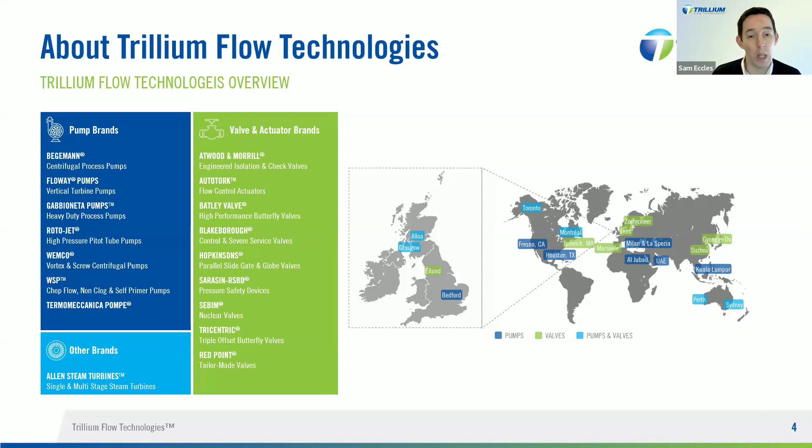We're going to talk a lot more about the WSP and Roto-Jet brands, so we'll just focus very briefly on the Termomeccanica Pompe brand. This is the most recent acquisition from a pump portfolio point of view, joining in April 2022 within the Trillium Group. That really expands our service portfolio, not just in terms of footprint around the world, but in terms of competence, giving us something none of the other brands can replicate, and allowing us to become a really leading service provider across all types of rotating equipment.

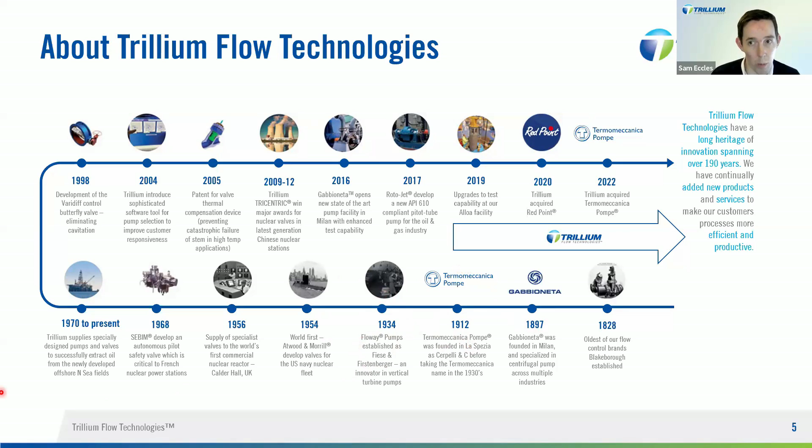We're not going to go through every brand in the interest of time, but let me pick out some key highlights - these three here all make up our pump portfolio. This is when we start to talk about three centuries of experience: you can see where we get that from, with the Gabbioneta brand in 1897, TMP formed in 1912, and Floway in 1934. Mine and Steve's role within the organization is to make sure we leverage all that IP, technology, and expertise within those brands, and look at how we bring them together to make them stronger as one business, more than just the sum of their parts individually.

For those of you who may not be too familiar with centrifugal pumps, we want to make sure we don't get lost in the terminology at the start. This is a very high level overview of the API standard designations, giving general terms for some of the pumps we'll discuss as we go through the webinar today. We recognize we're not necessarily just talking about the API industry, but these terms are generally used even to describe other types of pumps in terms of construction. So just as a very quick overview, you have OH, which stands for overhung.

You see 1 and 2 are horizontal, and the rest are all in the vertical orientation. BB stands for between bearing, so you have a bearing either side of the pump's impeller. All of those are in the horizontal configuration, and then VS as vertically suspended, as you can see there.

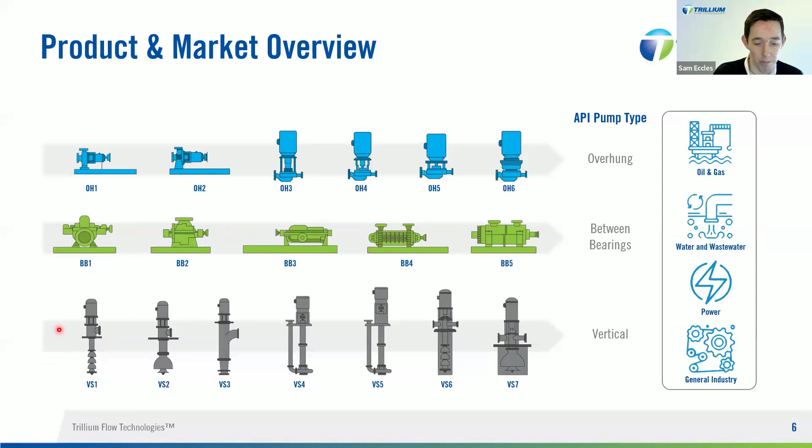Okay, so with that introduction, what we really want to talk about today is the challenges with low flow, high head applications. So we really want to talk about why these are viewed as problem applications, what some of the solutions are, and really why they're so misunderstood as a general area of the market.

So there's a variety of reasons for this. One of the first things we want to do is define what we mean by low flow. Typically we'll talk about anything that's below 100 meters cubed an hour, 440 US GPM, and above 150 meters, or 330 feet.

The reason these become so problematic is you can see from the chart on the right, for any given centrifugal pump, this is a typical head flow curve in blue and an efficiency curve that you can see in gray. At any given point, it's going to have a best efficiency point. This is where the pump is designed to operate, where vibration is at its lowest and the pump is providing its optimal efficiency.

As soon as you move away from that, efficiency tails off, vibration increases, and ultimately you get outside the preferred zone, into the allowable, and ultimately back to the limit that will be defined by the pump manufacturer. But as a general rule of thumb, the further away you move from the preferred operating range, the less mean time between failure you're going to have, the more maintenance you're going to need.

Two things that bring down centrifugal pumps are bearing failure and seal failure. The number one cause of those, from a mechanical point of view, not a process point of view, is vibration. So anything we can do to keep the pump operating here is going to improve uptime and reduce the number of problems end users have to deal with.

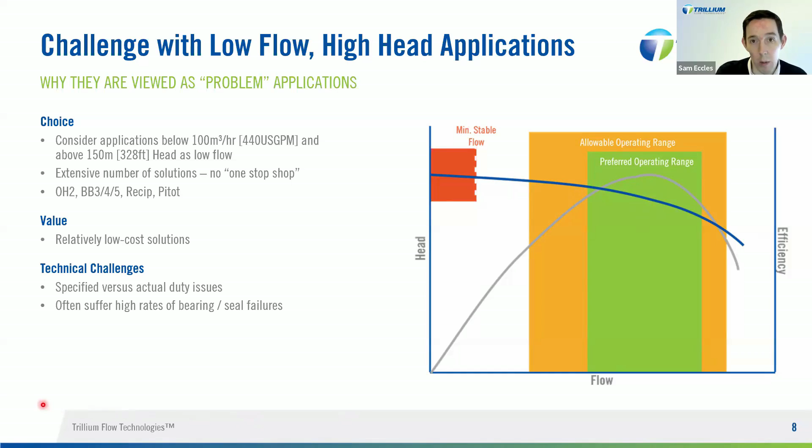In general, if you were to talk with any end user, most of their problem applications will be pumps operating within this low flow, high head range. So that's the problem we're trying to solve. Over the next 5 minutes or so, we'll run through some of the standard solutions, and then Steve's going to take you through our pitot tube range and explain where that has its place in solving some of the problems in this market.

So the number one, most common pump in the industry, almost any industry, is this end suction, top discharge, very standard centrifugal, single stage, overhung pump. It's an OH2 per the designations we talked about earlier.

The advantages to this: they are very low cost, they are very well known. Probably 3/4 of the pumps on a refinery will be this kind. If you're in a chemical plant or water treatment plant, most of the centrifugal pumps will look like this.

Relatively low head. So in terms of some of the challenges, as we need these ultra high pressures, these pumps become unsuitable. And equally, as we go to very low flow, so below 20 meters cubed an hour, 90 US GPM, these pumps will start to struggle, just because getting these passageways cast becomes very challenging.

So there's a finite size that you can go down to, and then per the chart we showed previously, you end up operating at a much lower flow than the pump's designed for. The pump will vibrate more, you will run into more problems.

In terms of the head limitation, you're really limited by how large you can make this impeller. We are governed by API deflection limits at the seal face here. This is an overhung shaft and overhung bearing, and we can only run these impellers to a certain size before we get unacceptable deflection levels, which would ultimately cause seal failure, both through vibration and through shaft deflection. So for the very highest head areas we want to get to, these pumps run into limits. But in terms of the vast majority of the market, this is the go-to solution.

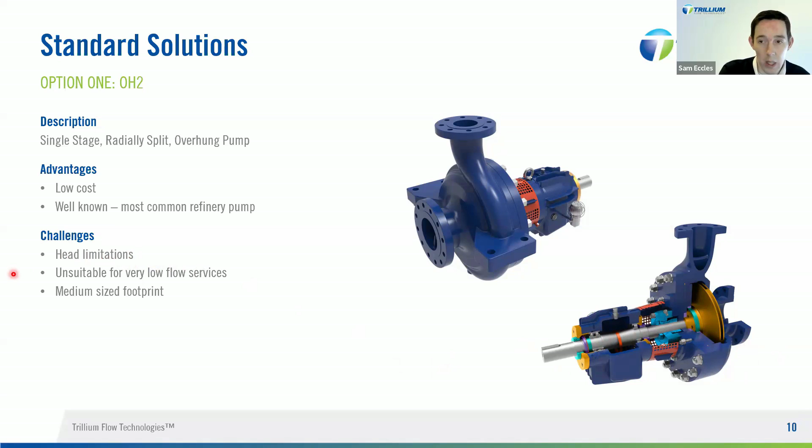Now, as with anything in engineering, you don't get anything for nothing, and the price you pay is these are very low efficiency. Typically these units, it's not uncommon to be below 10%, and that's 10% at its optimal operating point. If you operate away from that optimal point, you can be at 5, 6, 7%, very commonly on this type of pump. Now it will operate reliably there, but it's not efficient. And again, if you have one of these pumps, that's not a problem.

If you have 100 of these pumps, that starts to become very significant. And that's where it's very important for these low flow solutions to be looked at as a holistic proposal and not always just in isolation, because in isolation, it will often make sense to go down this route.

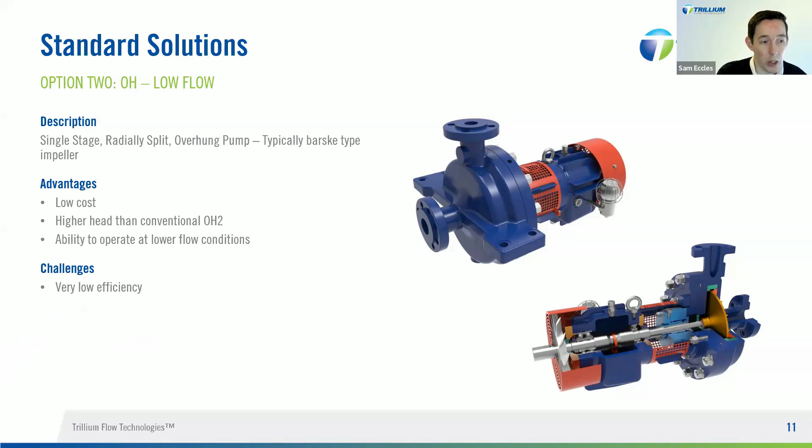If you have more than a handful of applications, it may not. It's important to note, energy cost is by far and away the largest cost associated with installing any piece of rotating equipment, especially pumps.

If we then get onto units that are for significantly higher heads, these will go well in excess of 1,000 meters, over 3,300 feet. These are a huge order of magnitude more expensive than the previous pumps we've shown, as you can tell just looking at the construction. They typically can be 5, 6, 7, 8, 10 times more in terms of cost, but they will achieve duties that the others simply can't.

When these are operating at BEP, they are much more efficient. Typically, you'd be looking at 60 to 70% efficiency at around the 100 meters cubed mark for this type of pump. They are often the only option for some ultra high head applications.

However, the challenges they come with: very expensive, as we've touched on. And if you start to get below 60 meters cubed an hour, you're really going to start to struggle with these. At that point, you have two options.

You can either recirculate some of the flow, and then what happens is the pump is going to look very efficient, but when you look at it as a system and factor in that recirculation, it will become very apparent it's not an efficient solution.

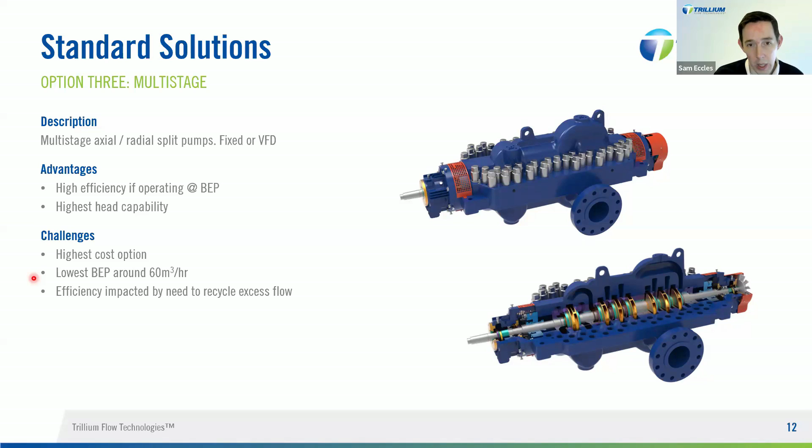Or there are some Barske type multi-stage pumps you can go to within the industry, but they are not a common solution and are not widely accepted within specifications at present, although that may change going forward.

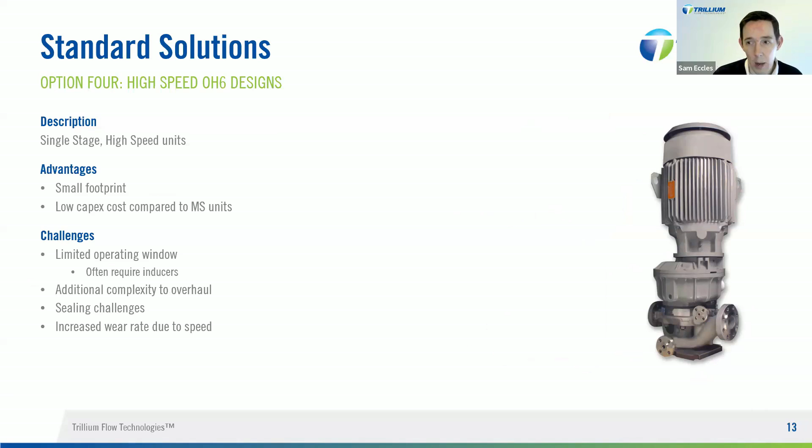If we look at option 4, this is probably what most people think of when they think of a low flow high head pump. It's an OH6 construction, as you can see by this graphic.

This is really quite different to the other options we've talked about. It has the conventional motor in a vertical orientation with a gearbox, and typically an impeller running at 20,000 RPM, when everything else we've talked up to this point would be capped at 60 hertz two pole, around 3,600. Because of the speeds they're running with this impeller, they need to run an inducer to make sure there's enough suction pressure within the pump.

Advantages these give you: they are a very small footprint, particularly being vertical, they take up very little space. They are very cost effective at the point of purchase, so the upfront CapEx cost is very low and they are very favorable in terms of those assessments.

But as we've mentioned before, and as we're trying to say all the way through, there is no one size fits all, and these do come with some limitations. The operating window is small on these pumps compared to all the other units we've looked at, and that is largely due to the inducer. Steve's got a slide he'll talk to you later explaining that in more depth, but for the purpose of this overview, all you need to be aware of is there is much less flexibility.

So if you are certain where you're going to operate, these are a very good solution. If the process is going to be consistently turned on and left running, very good solution. If you're going to have upset conditions or you need to achieve a wide range of duty points, these can be very problematic. And it's not just about whether you achieve a wide range of duty points, it's how accurately you are able to predict where you need to run.

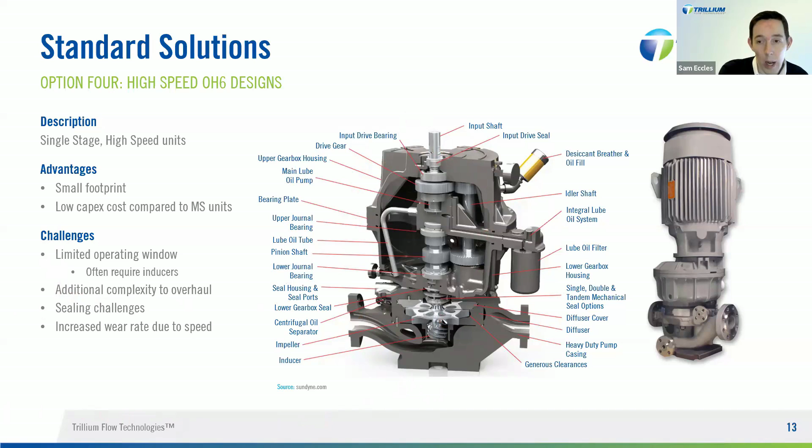The trade-off is these can hit head limits that you would only hit otherwise with the multi-stage BB3 and BB5 that we showed earlier. Then the last of what we're calling the standard solutions is positive displacement.

There are many types of positive displacement pump. We are just showing one of them here, the reciprocating pump. You can think of this very much like a car engine. It's got the same valve gear up ahead and a series of plungers instead of the pistons you'd have in your car engine. But in terms of principle, it's largely the same.

These are very high efficiency, very compact. You have the ability to put the drivers directly above the pump with belt-driven options. These can be made and fit into a very small space, reasonably cost-effective as well, depending on horsepowers and flows. Challenges that come with these: you have a lot of pulsations downstream of the pump to manage. These can be alleviated with pulsation dampeners, but you then take away some of the advantages because the skid becomes less compact and more expensive.

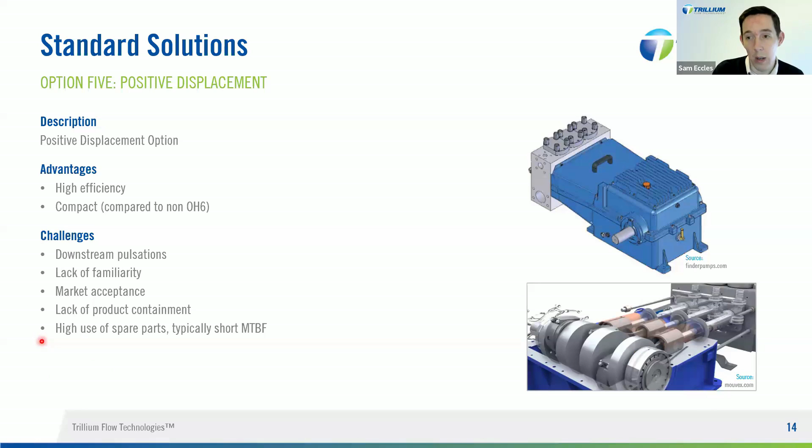Also, lack of familiarity, particularly outside of North America, I would say. Most people just won't consider these — it's not even open to be debated. And really the main challenge here is they do use a lot of spare parts. So the mean time between failure and overhaul isn't great, which means if you need something that's up 100% of the time, you're going to have a spare on standby that's also piped in.

So if we try and talk about another option, something Trillium is relatively unique in offering, it's our pitot tube pump range. We refer to this as the Roto-Jet series, and these are pumps that can be provided in a variety of configurations. We're showing it here in a between-bearing configuration, but we'll show you later it can be done in a similar way to the overhung pumps we've shown earlier.

The advantage here is it gives very reliable low flow, high head operation — much more so than the other designs we've touched on — and it allows versatility. Where you want to operate on the performance curve does not impact mean time between failure. Steve's going to talk in detail about why that is, but that's the main advantage these units have. No pulsations, so we don't have the challenge we talked about with the recip on the previous slide. And if you were to do a like-for-like at the same speed as an OH6, these will operate at a higher pressure and deliver more flow.

They're also very efficient within a certain operating window. In the studies we've done, if you're below 100 cubic meters an hour, 440 US GPM broadly, these will be more efficient. If you're at very low flows, sub 20 cubic meters, 90 US GPM, there'll be a huge efficiency advantage for these — they can be 4 or 5 times more efficient than a Barske OH2 design, for example.

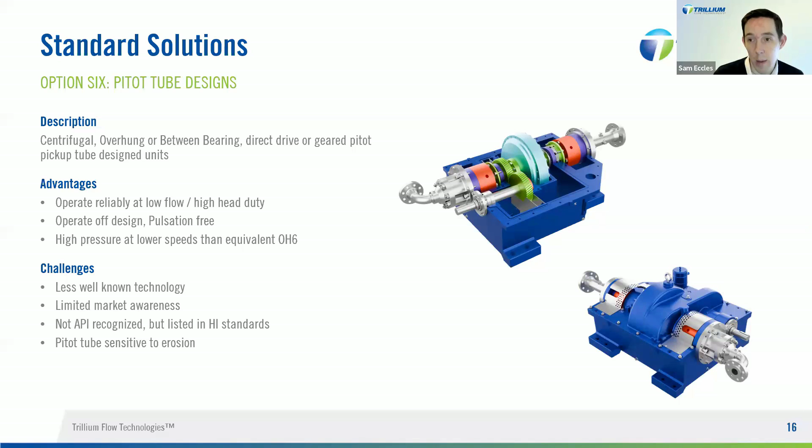And finally, as Steve will explain with the video we have later, the pitot tube, which is the part that does all the work in this machine — think of it almost as the impeller in a normal pump — is very sensitive to erosion. So if you have a process without any particulates or contamination, that's not an issue, but anything with contaminants in it is something that does need to be taken into account.

The key point we want to make here is these are not new pumps that we're showing. This is something we've been manufacturing since the 70s, and we have thousands of units installed in the field. Again, it's just about us trying to raise awareness.

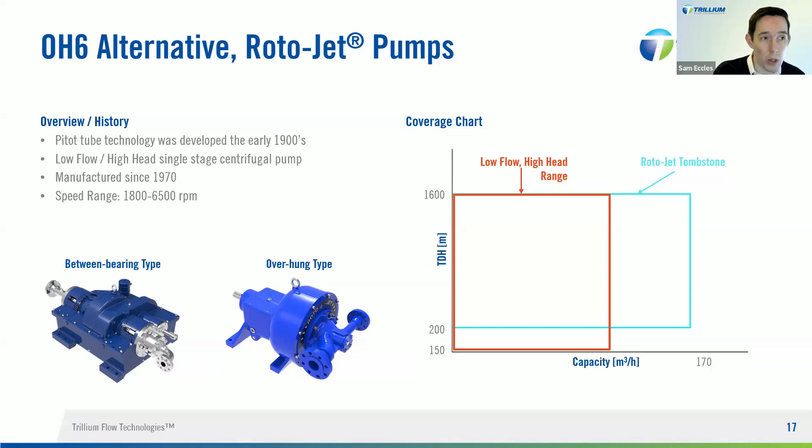As you can see from the two images there, we have the between bearing and the overhung arrangement. And with that, I'll hand over to Steve, who's going to take you through a bit more on the history and the technical benefits of the pitot. Thank you, Sam. Just very quickly, we'll take a look at the history of the Roto-Jet pump.

We first introduced and developed the pitot tube pump technology in the early 1970s, over 5 decades ago. Throughout the 1970s, we were quite active in development and R&D work, and were awarded over 40 patents on pitot tube pumps. In 1979, we introduced our first oil lubricated pump for the refining and petrochemical industries.

The following year, in 1980, we received the Chemical Processing Vaaler Award for a major contribution towards efficient plant operation. In 2004, the Roto-Jet pump was named the Technical Innovation of the Year by the British Pump Manufacturers Association. This was for our variable speed Roto-Jet technology using a switch reluctance drive motor.

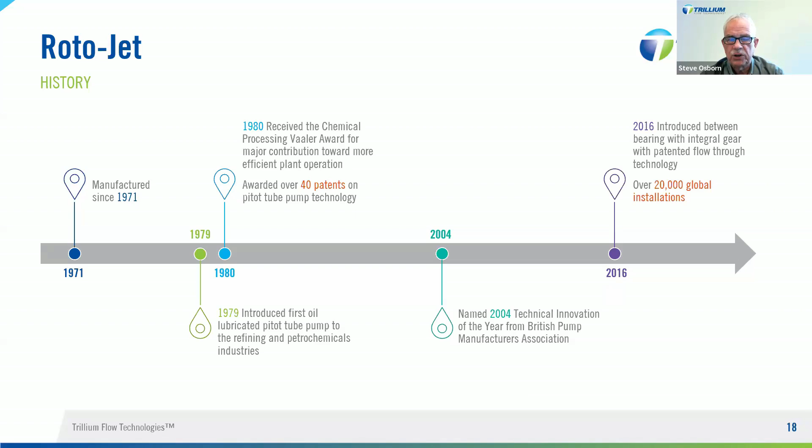Then in 2016, we introduced our between bearing design with our patented flow-through technology that allows us to have a very reliable design of a pitot tube pump for refinery service. There are over 20,000 installations of Roto-Jet pumps around the world, and we have quite a history of working with a variety of applications in a wide variety of industries.

We're going to go through a video here. It'll just take a couple of minutes, and I would like to walk you through it, so we can see the rotating element of a pitot tube type pump.

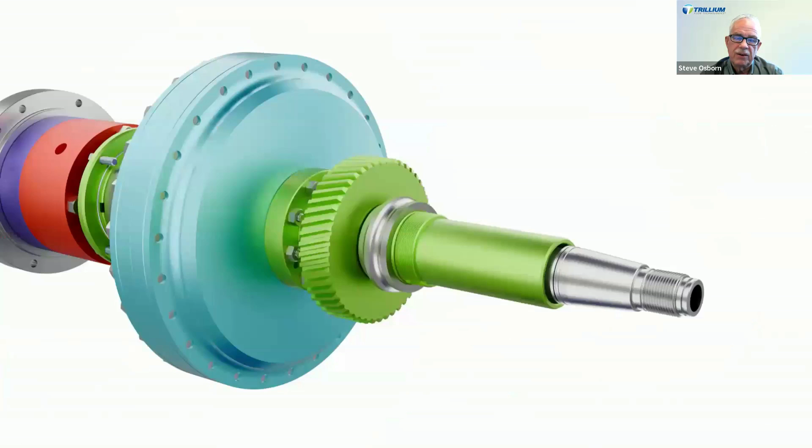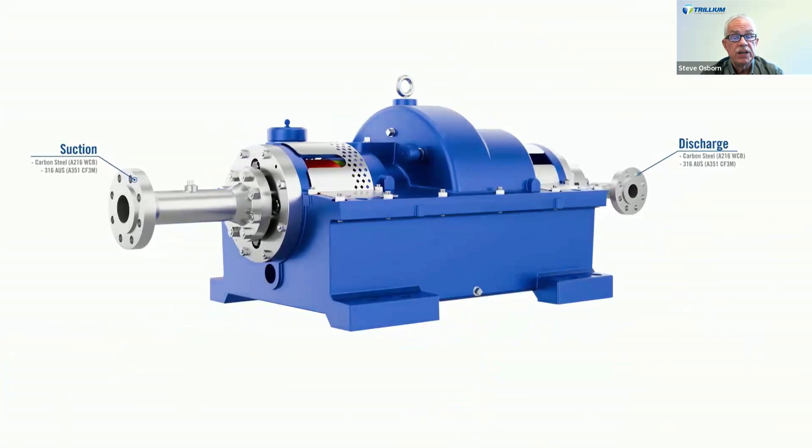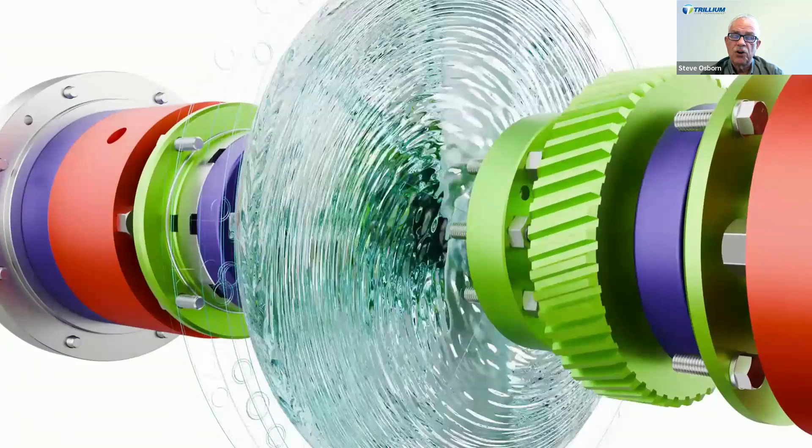The key working element of any pitot tube pump is the pitot tube itself, which is always stationary. You can see on this design that the liquid flows through into a rotor cover, into the rotating assembly, where we have vanes cast in the assembly that increase the velocity of the liquid. The high velocity liquid discharges into the rotating case, where centrifugal forces cause it to turn at the same speed as the rotating assembly.

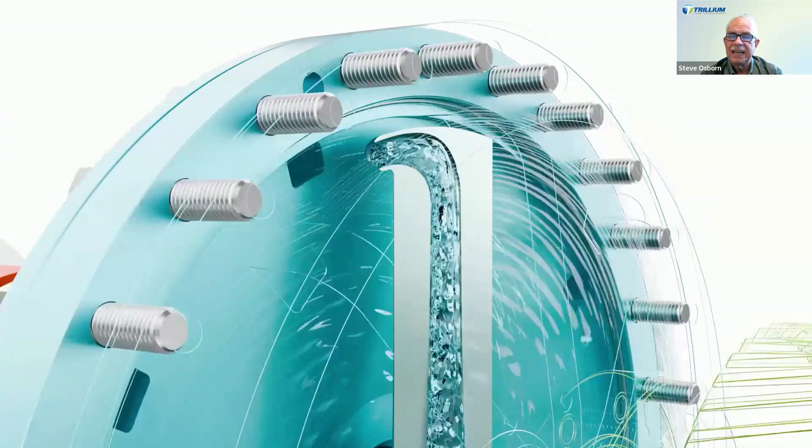It will then impact the stationary nozzle of the pitot tube, which acts as a very efficient diffuser to collect the liquid and discharge it out into the system. You can see through this design, it's actually quite simple.

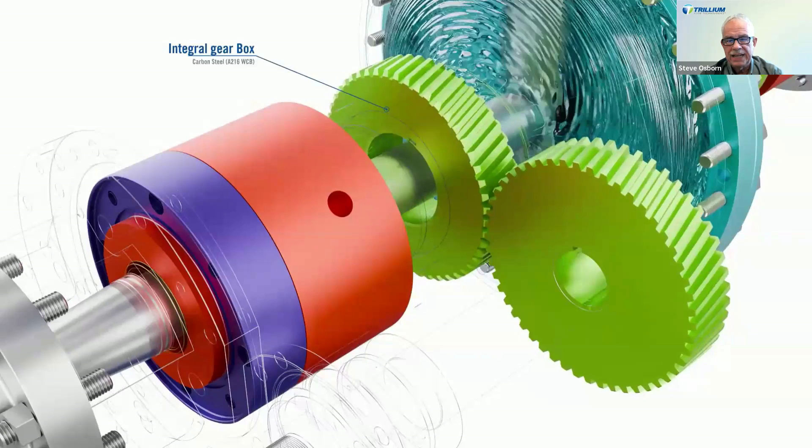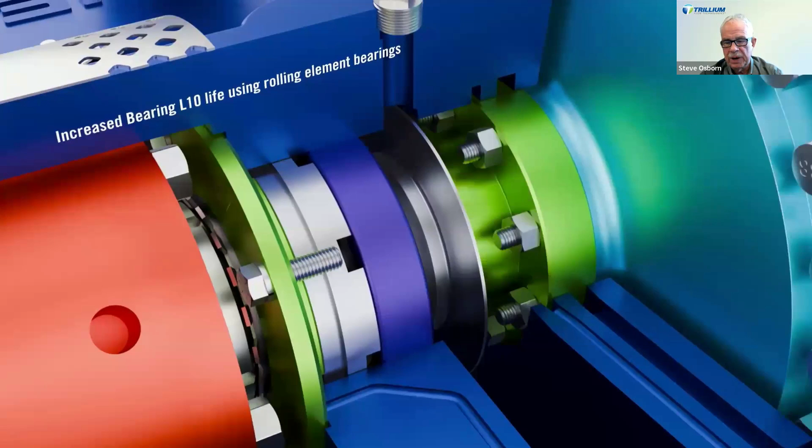We have cartridge mechanical seals on each side of the rotating assembly, and an integral gearbox that increases the speed of the pump. There's no external lube, and no wear rings required. We're able to have a very robust, simple design that will get high heads at very low flows quite reliably, and we have bearing lives that will exceed 25,000 hours.

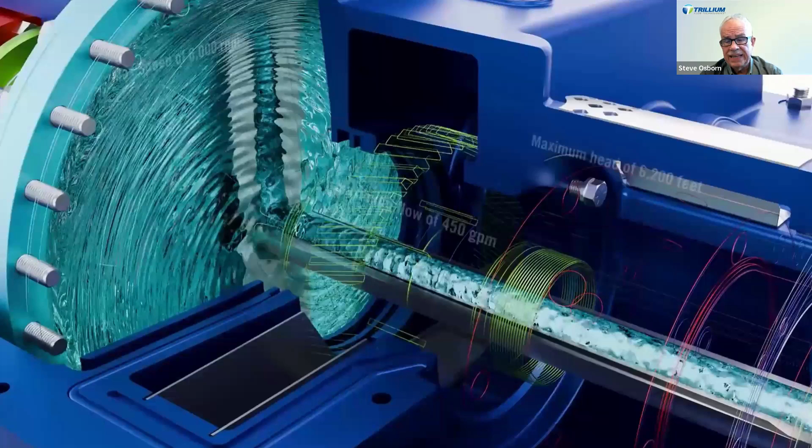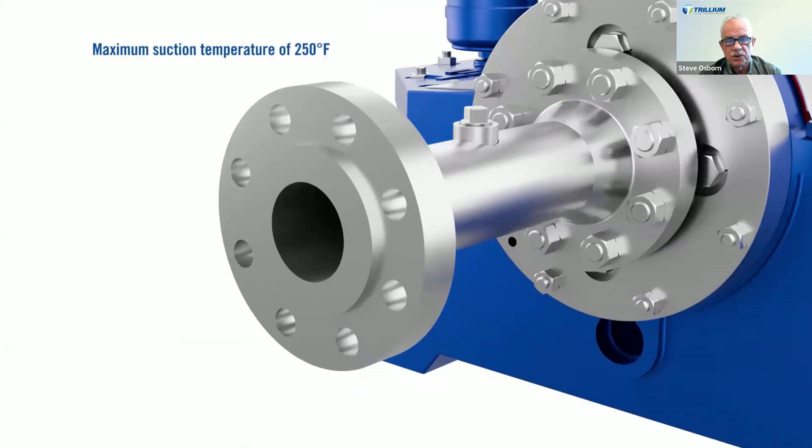We'll just quickly overview: you can see how the liquid enters in and then discharges out through the pitot tube. We can go up to, we'll go over the parameters, but up to 450 gallons per minute. So we go up to some decent sized flows, and we can go up to 250 or much higher if we have a seal flush available.

So we've got a very efficient design using the pitot tube pump technology, which is extremely versatile. We'll have a couple of slides where we can go through and explain how we achieve that versatility and how we achieve the different performance requirements in pitot tube type pumps.

So when we look at the Roto-Jet pump as an alternative to the OH6 technology, you can see the performance capabilities of the pump. As I mentioned, we can go out to 450 gallons per minute, or just over 100 cubic meters per hour, with heads up to 1,600 meters, or over 5,000 feet of head.

The maximum suction pressure is 300 psi, or 21 bar, and without any flush at all, the maximum temperature would be 250 degrees F, or 120 degrees C. But we can go significantly beyond that if we have seal flush available, and perhaps cooling water for the bearings if we get into the very highest temperatures.

Our maximum speeds are going to be in the range of 6,500 RPM. Most of the applications that we're going to look at for pitot tube pump technology are going to be in the 4,000 RPM to 5,500 RPM range. And the maximum power is 400 horsepower or 300 kilowatts.

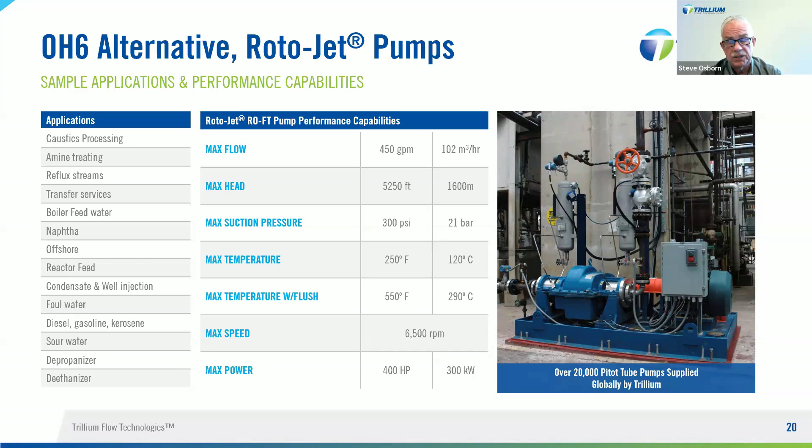So we'll take a look at how the principles of the Roto-Jet pump work and what some of those advantages are. One of the things is the pitot tube is always going to be stationary, and that stationary pitot tube is the heart of the pump.

If we need to change the capacity of the pump, we just change the diameter of the opening of the pitot tube. By changing out one component, we can go from a pump selected to operate at a very low flow rate to one that could go to our maximum flow rate by only changing out one simple part. The pitot tube always has an opening at the 12 o'clock position that allows the pump to vent any gas that's inside.

And if the capacities increase, then we would add a second opening, at 12 o'clock and at 6 o'clock. So there would be two openings on the pitot tube. It's always going to be stationary. There's never an occasion for the pitot tube pump to rotate at all.

Our pumps, the ROFT design we're looking at right now, are fit with API 682 mechanical seals and a cartridge design. We also have gas seals available, and the seals are isolated from the bearings to prevent any contamination from seal leakage into the bearing housing.

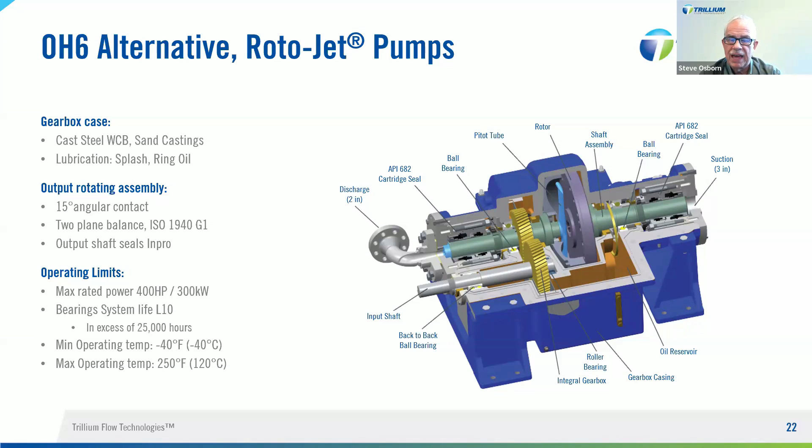So the key advantages of this type of pump, as has been pointed out already, is the ability to operate across the entire performance curve, including back towards shutoff and beyond BEP. We'll take a look at why that is.

The pump is very easy to maintain with access to the mechanical seals. You don't have to remove any gearbox components or worry about making difficult changes to replace a mechanical seal. You get smooth, pulsation-free performance because it's a centrifugal design. It's very simple, only two basic working parts, and you have a lot of flexibility. By changing one part, you can adjust the capacity of the pump quite easily.

The mechanical seals are only sealing against suction pressure. They're isolated from the bearings, and on our ROFT design, we take no exceptions to API 610.

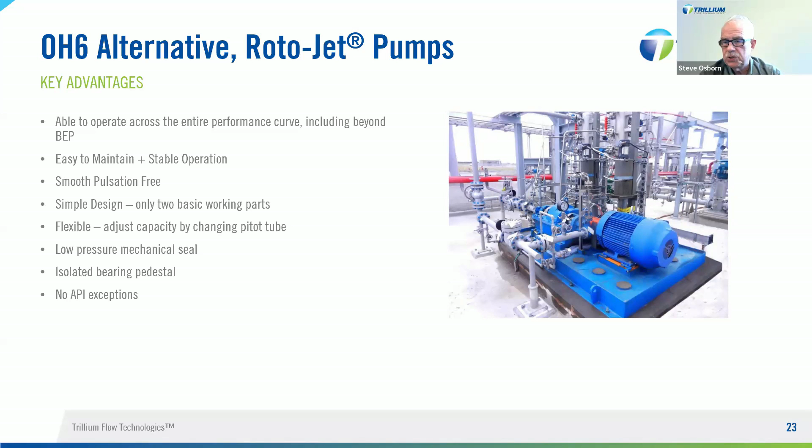So if you have a condition where the pump is operating with stable operation, no upset conditions, and is selected and operated at the correct design point, then the NPSH is going to be adequate. If you move away from that in either direction, you're going to start to see a significant increase in the NPSH requirements.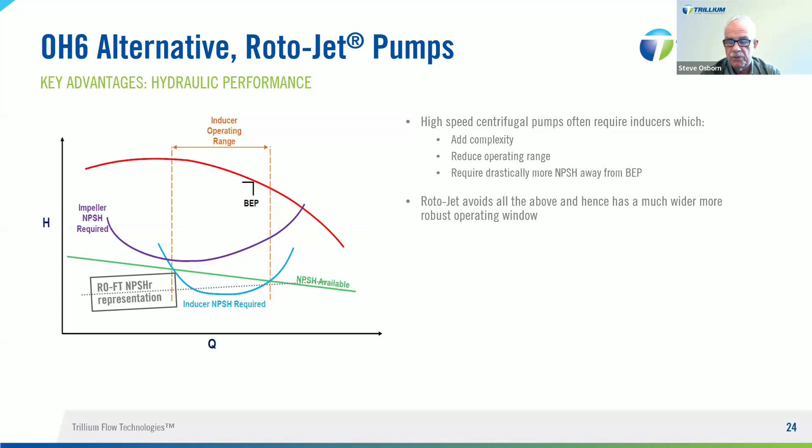And when pumps are designed, we'll take a look at what allows the pitot tube pump technology to operate at such a wide range of flow rates.

So when a normal centrifugal pump is designed, the pump designer has a given operating condition of a flow to achieve and a head to achieve, and that becomes the best efficiency point. So you select an impeller and design a volute to operate at that condition very efficiently, and at the design point, that becomes the best efficiency point of a centrifugal pump.

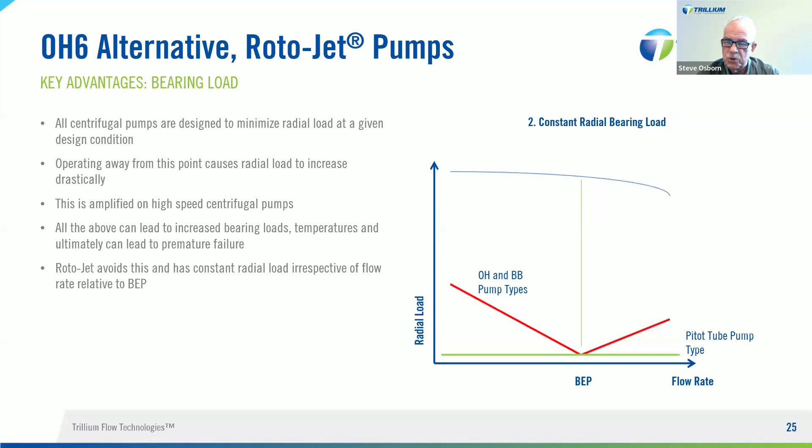When you look at the green line that shows the radial load on a pitot tube type pump, you can see that the radial load the pump is going to experience is constant regardless of the flow rate. So that allows the pitot tube pump to operate at very low flow conditions, all the way back to shutoff or beyond the best efficiency point, without seeing any increase in radial load. So you eliminate the shaft deflection you would see when you move away from the best efficiency point on a normal centrifugal design.

So when we look at our ROFT design, you can see that we have an API 682 mechanical seal. It's the standard size 8. We fit the pump with both the John Crane and Flowserve seals. It can be fit with any API 682 size 8 design.

We are familiar with and use all API flush plans. Most importantly, the seal is only going to seal against suction pressure. We don't ever have to seal against the discharge pressure or try to balance out any pressures in the pump. And there's no shimming required in the cartridge design when you replace the seal or assemble the pump. You just put in the cartridge and the pump is ready to go.

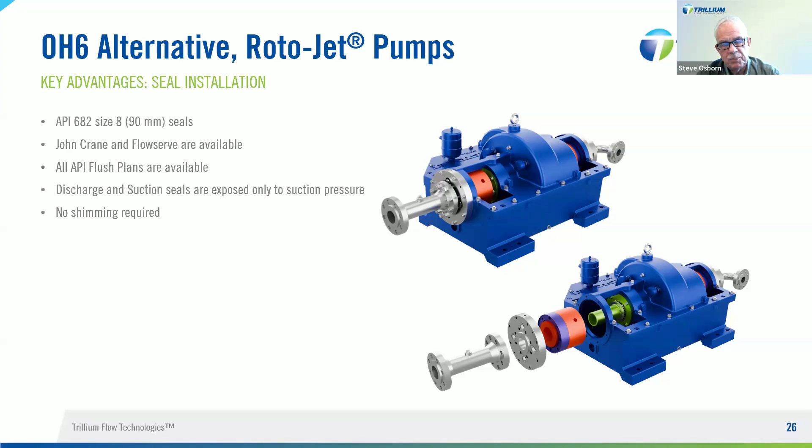So we'll look briefly at some of the configurations we have in pitot tube type pumps. Over the 5 decades, we've made a variety of pumps, and we still manufacture several technologies today. We also have, found in the API design and used in the petrochemical and refining industry, our model RO and ROH. It's an oil lubricated design, which has been around for a number of years and has quite a good reputation of operating reliably in refining and petrochemical services. It's an overhung design.

It does have some limitations, in that we can't have quite as much range and capability as our ROFT design that we've been discussing. We have several designs used in industrial services, including our RG and 2100, which are both grease lubricated pumps, as well as the 2200 pump, an oil lubricated pitot tube pump design for industrial services. We also have our R11 design, a smaller version of the pitot tube pump, which allows us to operate at lower heads and still have a competitive offering.

And of course, as was mentioned, we have our variable speed design, the VSR, which has inherent variable speed without a variable frequency drive, using our switch reluctance technology, which has become quite popular in certain industry segments.

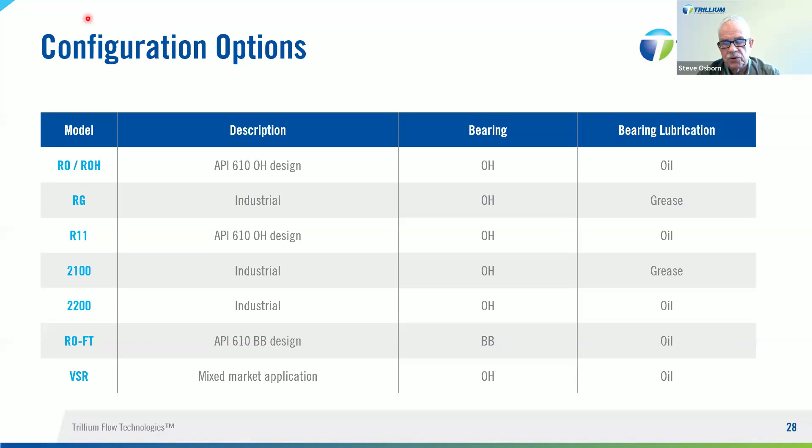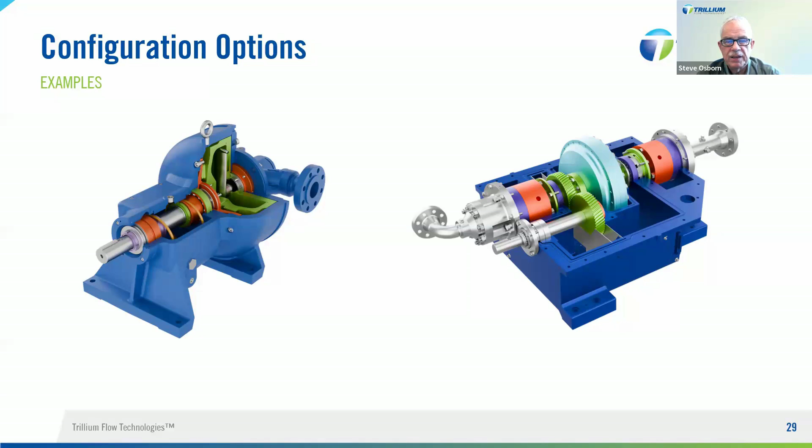Perfect. Thank you very much for that, Steve.

So with that, we're just going to take you through a quick case study example. This wasn't produced by Trillium, it was actually produced by Aramco. We're happy to share the details if it's of interest, and can circulate the full paper if you reach out via the contact address from the webinar. This was presented at the Middle East Turbomachinery Symposium.

This was really quite a common story of where Roto-Jet, or pickup tube, pitot tube type pumps, are best used and where they're most commonly retrofitted. As we mentioned at the start, and want to continue to repeat, there is no one-size-fits-all. None of these technologies is inherently better, it's all about knowing when each has its place.

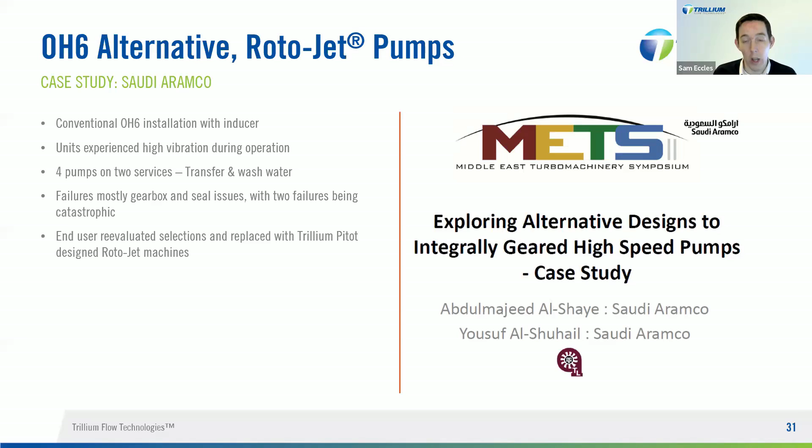We bring this up as an example because you can see the values here. Catastrophic means run to fail, so you can see the numbers - these are significantly more than the units would cost, whether OH6 or pitot tube type pump. As we mentioned at the start, because these are relatively low cost pumps, sometimes they don't get the scrutiny they need.

That means they sometimes go into services they're not well suited to, and you end up putting the wrong technology in place, which ultimately fails. It's not that the technology is bad, it's just that the design criteria didn't necessarily match the real world. What was found here was that once these were switched out with a pitot tube type pump - something that could operate away from design reliably, for all the reasons Steve touched on - these issues went away.

There were no repeat problems. Again, it's not about saying there was a process problem, it's about understanding the right pump for that process. And it's not just the process at its design point - it's how often it starts and stops, how often there's variation, how often something interferes to cause an upset condition. You only need the upset condition to occur once for one of these failures to happen, and you can see the values rack up very quickly.

These values don't account for loss of production, and they don't account for man hours - these are just parts costs. We just highlight this as one example of many.

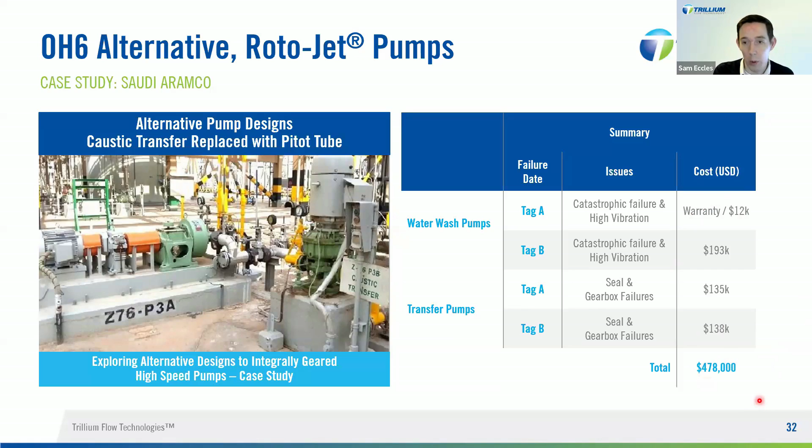So with that, we just want to give a very quick recap of the points we've touched on. Some of the advantages of Roto-Jet: reliability. It's fully compliant with the most stringent standards in the industry, whether that's API 610, 682, it's referenced in HI, and referenced and specified in Aramco standards.

Bearing system life exceeds the 25,000 hours needed for API. Number one advantage is they are flexible, with very low vibration levels, and can operate back on curve.

If there's any uncertainty or upset in the process, this is a very good technology to promote. That ability to run all the way from closed valve to 120% of BEP, you cannot do with a conventional pump, and you really cannot do with something like an OH6.

So again, safe - there's no emissions to atmosphere, and you don't have any pulsations to worry about either. From a cost-effective point of view, there is no one size fits all, but there are certain points within that low flow, high head tombstone that these fit incredibly well.

Sometimes there will be the lowest cost to start with, sometimes the lowest cost operationally, and sometimes neither. It's very important that we recognize that, and that statement is true for every type of pump we've mentioned in this presentation.

What we do feel, however, is these kind of pumps pick up a disproportionately low percentage of the market. It's our mission to make sure we change that over the next few years, because there are far more applications these are suited to that they're not selling into than the other way around.

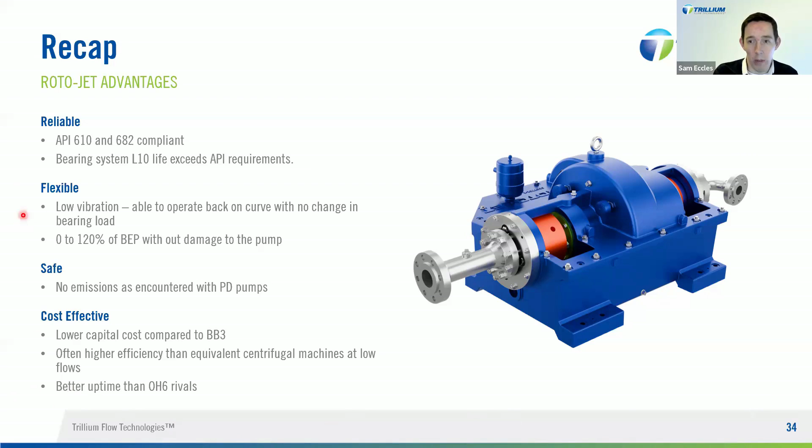And in terms of uptime, that's the real winner here, and it's because of the flexibility and the robustness of the design. Okay, and with that, we'll say thank you very much for listening.

What we'll do now is go through a few questions that have come in. The first of which I'll direct to Steve: are these only manufactured within the USA?

Well, historically, they have only been in the USA, but under the footprint of Trillium, it's been expanded where we can offer our pitot tube pump technology manufactured in our facility in Nova Milanese, Trillium Pumps Italy. So they're actually made in Europe and the United States today.

Perfect, thank you Steve. We had another question: can these replace an OH6, which I hope we answered with a case study - the answer is yes, they absolutely can. Obviously you need to take into account pipe work constraints, footprint, etc. But as a short answer, yes, there is always a creative way these can be made to replace an OH6, although it very often does require some work with the end user.

Thank you, Steve. And the last question was on efficiency, which I hope we touched on with the last comments. There really isn't one magical answer on that - the efficiencies at times will be beneficial, at times worse, and very often a wash and unlikely comparable. It's important when we talk about efficiency that while it is an important factor, uptime, maintenance, and full life cycle cost is really what we need to factor in. Energy consumption is always the biggest cost with pumps, so efficiency is always very, very important.

But as we showed with the case study and some of the repair bills, we do need to make sure we're looking at uptime as well, and full maintenance cost. So with that, I'll say thank you very much - I think that wraps us up for questions, and thank you everyone for your time and attention.